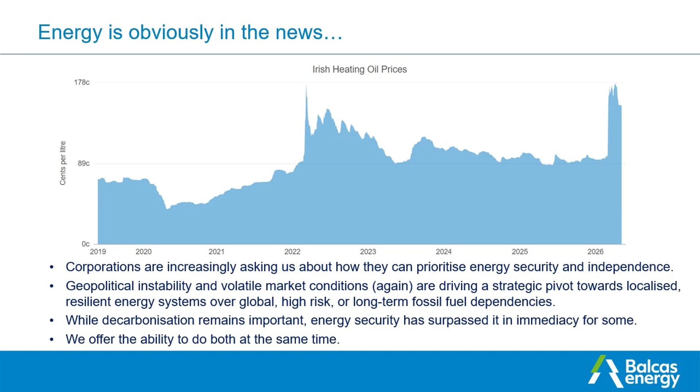You'll have heard Colin and Paula talk about powder burners, and these are very much a niche. They don't suit everywhere, and not everywhere suits them, but we have focused on these over the last few years, and I just want to share some of the success we're now having, and the sort of applications that they suit.

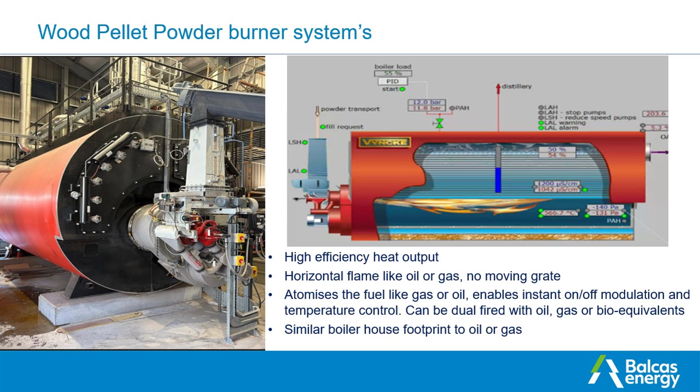Basically, as you can see in the picture on the left, they look like an oil and gas boiler. It's a horizontal flame, like an oil and gas boiler. They atomize the fuel like an oil and gas boiler. And they can on, off, and modulate, again, like good old fossil fuel that I came from. And the other important thing is they have a similar footprint to oil and gas in terms of the boiler house and the fuel storage. So you don't need lots of extra space. You can actually fit into the same boiler house.

Some of the systems are now installed, finishing commissioning and running in GB, with 4 up and running, mostly with distilleries: 3 6-megawatt systems installed with Diageo across 3 distilleries, Glenlossie, Mannochmore and Linkwood, and 1 5-megawatt installed on the Isle of Jura, which was the first one. In hindsight, we should have picked somewhere other than Jura for the first one, because it's not the easiest of places to get to, but hey-ho.

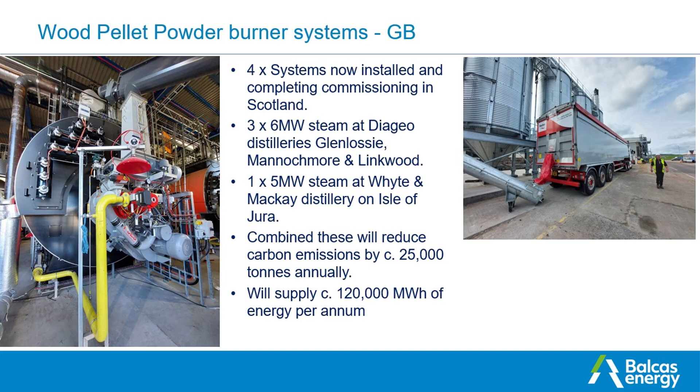So combined, those 4 systems are going to reduce carbon emissions by around 25,000 tonnes and are going to supply in the region of 120,000 megawatt hours of energy to those sites per annum. And we'll supply that from our Scottish production site.

You've heard other people talk about it, and it's now in the public domain on the Enterprise Ireland website, so thank you to them for their support. There's one now been ordered, and this time next year it should be up and running in Ballaghaderreen, County Roscommon, another first for Roscommon. They're going to have Ireland's first wood powder burner.

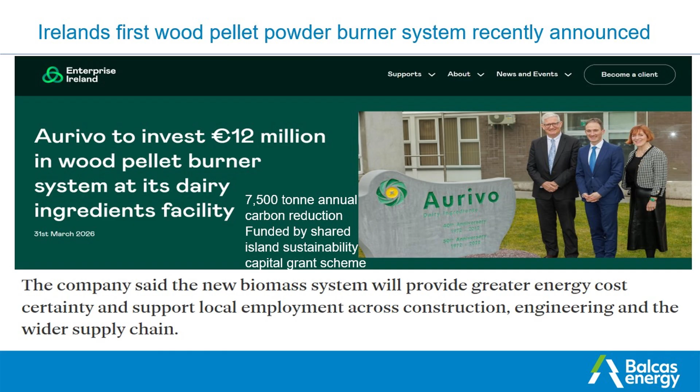The other thing I wanted to share is that this is about energy mix and people using different fuel sources and energy sources to make their heat. The factories and plants we've been working in use a lot of steam. This particular one, which is one of the Diageo sites, had an existing 3 megawatt wood chip, which is the straight red line at the bottom. And we have put in 6 megawatts to displace the fossil fuel.

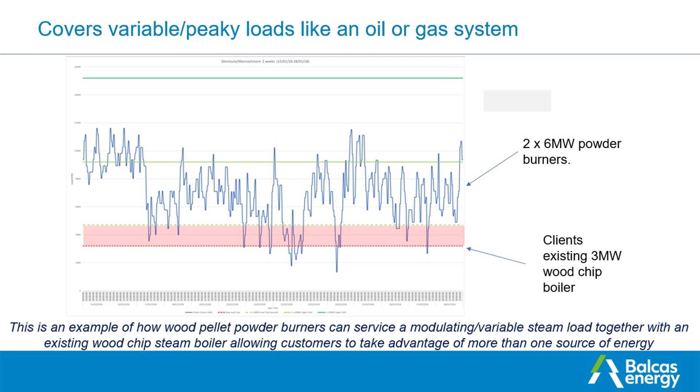So we can work in conjunction with other fuels with this system. And indeed, the powder burners are dual fired, so they can also be bio-oil, biogas, or indeed good old fossil fuel, either as a combination with the powder, instead of the powder, or if it goes on to low firing. So it gives people the ability to use more energy sources.

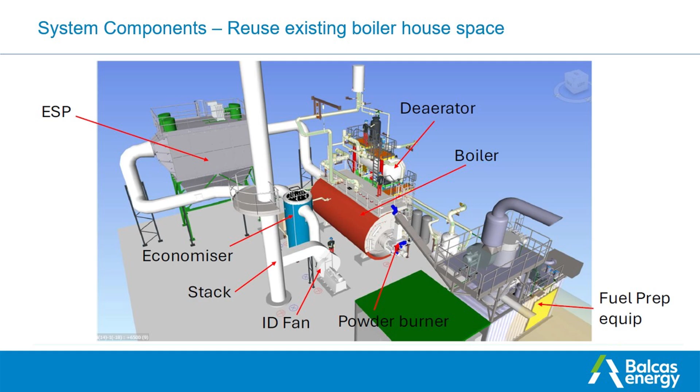The basic system components, without teaching my granny how to suck eggs, it's very simple. There's 3 stages, 4 if you count them. Fuel storage, fuel silos, fuel prep, which is taking the beautiful pellets and grinding them into powder. There's a powder burner, and then there's flue gas treatment, where we have been using electrostatic precipitators to make it all MCPD compliant, if I get my acronyms correct.

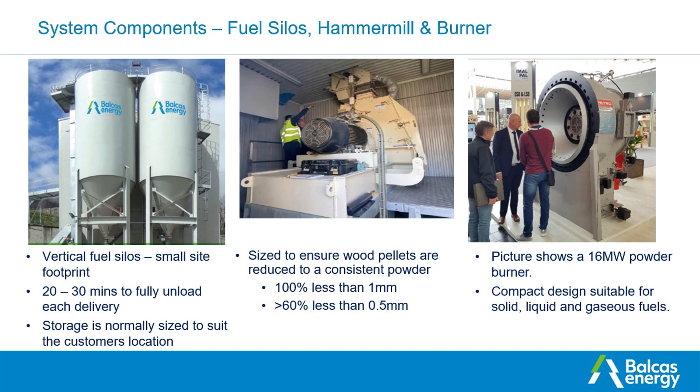If it's a powder burner, the second stage is the hammer mill, which a lot of these distilleries would have on site anyway for treating the malt. And the other stage is the powder burner itself, and that's a 16 megawatt one in that picture, and you can see how compact it is, and that just bolts on to a shell and tube boiler.

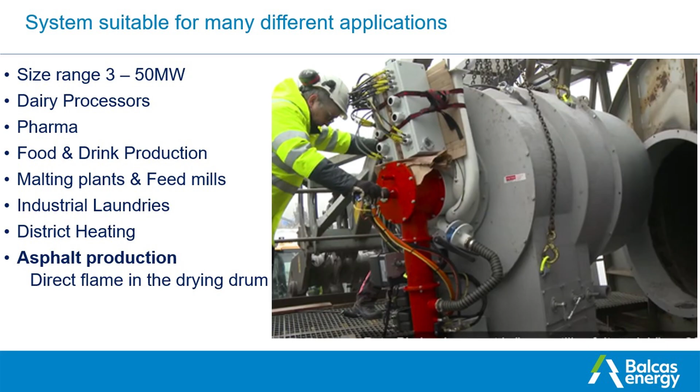The other thing with powder burners, and we're speaking to a lot of aggregate companies and asphalt companies, the company that produces this has a lot of installations in Scandinavia. So you can actually decarbonize the production of asphalt and replace your oil and gas burners, which are up to 20 megawatts in some sites, with one of these powder burners. Just unbolt your gas one and bolt this one straight in. So it's opened up applications that biomass and wood pellets never had before.

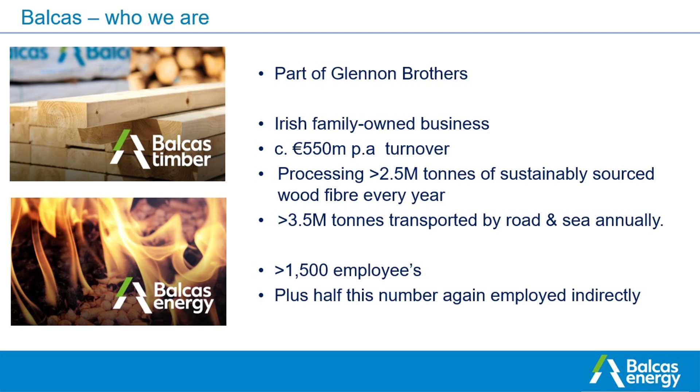In terms of the fuel behind the application, Balcas, we're part of Glennon Brothers, an Irish family-owned business. It's been growing in size. It's now about 500, 600 million euro turnover, processing 2.5 million tons of sustainably sourced wood fibre, about 3.5 million tons transported by road and sea annually, so we're a bit of a logistics company as well as sawmillers. It's growing now to 1,500 employees, and then about half that again employed indirectly. So a company with scale, that if it makes a contract with you, you have reliability of supply.

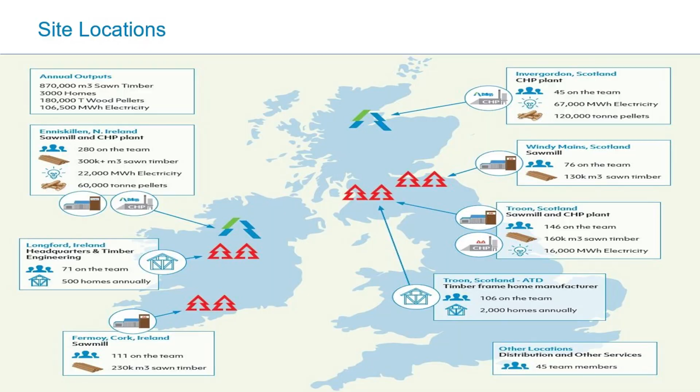So some people think there's not enough wood pellets in Ireland, but wood pellets have a robust supply chain, and there are other people in the room that make wood pellets, Laois sawmills and Leinster, and there's quite a few suppliers who can increase the capacity of production. It's kind of chicken and egg, which comes first, production or the customer. But these things take 18 months to 2 years to install, and in that same time, we can increase production.

We don't normally show, especially with competitors in the room, all our customers, but there they are. When you shrink the map, it hides all the little blank spots, but basically we're delivering everywhere on the 2 islands. We've been making wood pellets since 2005. We have more than 5,000 active customers, and we make about 25,000 individual deliveries every year.

And these customers range in size from 5,000 kilowatt hours, which could be Mrs. Murphy and her stove, or Mr. and Mrs. Murphy, or Mr. and Mr. Murphy, or Mrs. and Mrs. Murphy, depending on what part of the world you're in, right up to customers who take 240,000 megawatt hours annually off us. We have 8 distribution locations, 40 delivery vehicles operating in peak season.

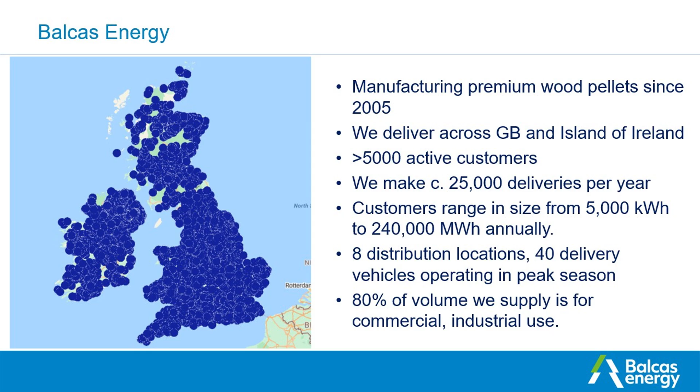And the thing that surprises people about wood pellets is that 80% of the volume we sell is actually used for commercial industrial use. Home stoves and boilers are a relatively small part of what we do.

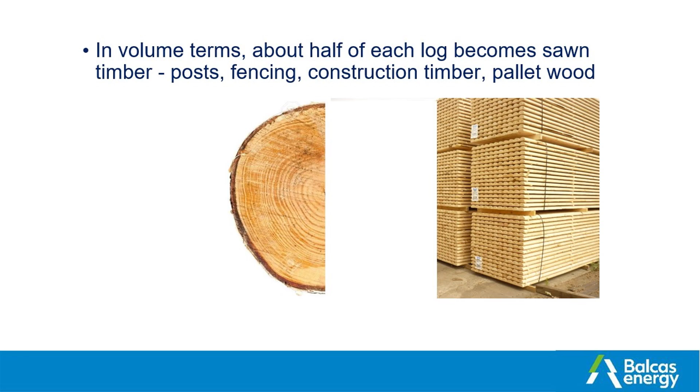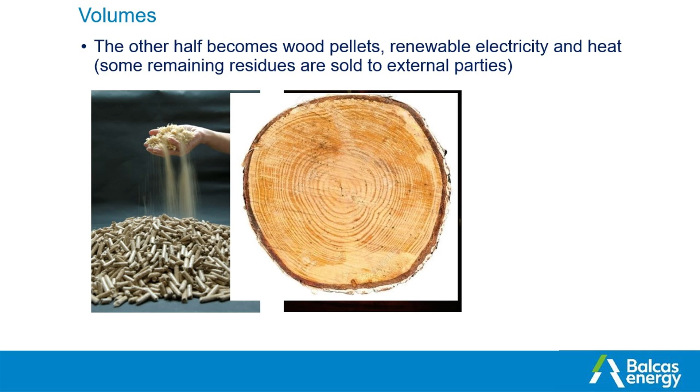You'll have seen this slide before, probably with Colin, but sawmillers just love cutting wood, and the energy business is kind of the waste disposal unit, because for every log that you cut, about half becomes finished timber, and the other half, we use it to make our own heat and electricity, and we use the residues to make wood pellets. So we're not cutting trees down to make energy, we're cutting trees down primarily to make sawn timber products.

Do our shareholders think there's enough fiber? Yes, they do, because they're investing heavily, buying sawmills, increasing the capacity of sawmills, and the more saw logs they cut, the more residues we'll have to make wood pellets and energy.

So, and it's the same as Des and Ken, in terms of, we guarantee supply for our contract customers. We have 2 manufacturing plants. We maintain unrivaled inventory within the industry, and we make the same amount every day. The plants go at 100%. In the winter, we sell more than we make. In the summer, we make more than we sell, and we build stock. And that's kind of how we operate.

So the accountants don't like it, but you know, coming into the start of winter, we might have 50,000 tons stored away, ready to sell, which takes a fair bit of working capital, they tell me, but this is what we do.

Our industry has an established, robust supply chain that's been operating now for over 20 years, so this is not a new thing. We use renewable electricity and heat that we produce on site in our biomass CHP plants to manufacture the pellets, and also to kiln dry our sawn timber. And we manufacture them, as I just said, from forest and sawmill residues.

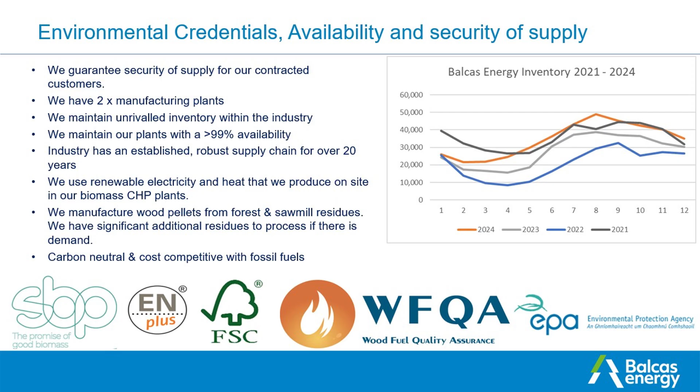And if we're processing 2.5 million tons of residues, of wood fiber through our sawmills, we have additional residues that we can process if there's demand. And we're carbon neutral and cost competitive with fossil fuels, even before the price doubled. So,

interesting thing in the EU ETS is that the carbon saving they allow you for biomass and wood pellets depends, 1, where it comes from, in terms of how far away it is from the point of use, and 2, how you manufacture it. And there's 3 cases. First case is if you're using heat that's generated by fossil fuel and you're taking the electricity off the grid, they only allow you a 72% greenhouse gas reduction.

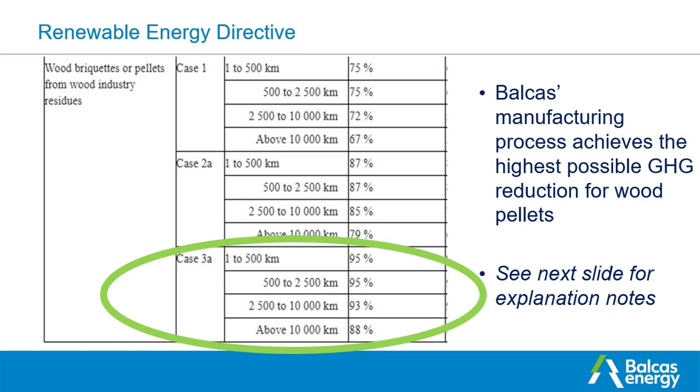If you're using biomass heat and electricity off the grid, they allow you 87% greenhouse gas reduction. And if you're like Balcas and you're using biomass heat and biomass generated electricity, they allow you 95% greenhouse gas reduction. So, something to look out for. But we're learning more as we work more with larger EU ETS customers.

So, we're not just a fuel supplier, we can do more if you want us to. And that involves turnkey installation. Again, we only got into boilers because there weren't enough people involved in putting large ones in, but if someone in the room wants to help us do powder burners, happy to talk to you. We can supply on a cent per kilowatt basis, or fuel input or energy output. And we have contracts up to 20 years long with some of our customers, who, again, they're indexed. And they're large customers like the Bacardis, Diageos, et cetera, of this world.

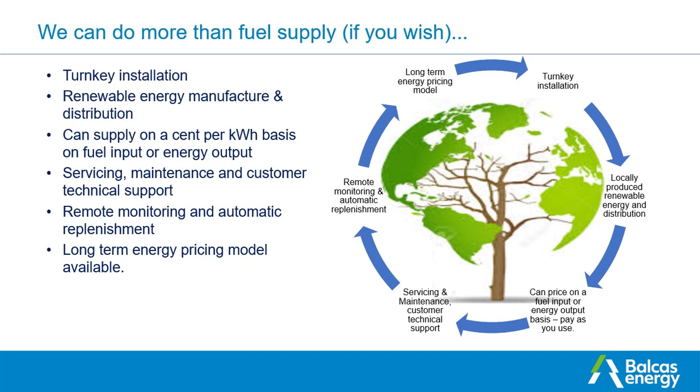We have a customer engineering team. So again, we can support and service and maintain this equipment. Because as a manufacturer, the last thing we want to do is build mountains of pellets with nowhere for them to go. We also do remote monitoring and automatic replenishment, so the customer doesn't have to ring us to order. We can actually make sure we deliver. And as I say there, we have long-term energy pricing models, again, for our larger customers.